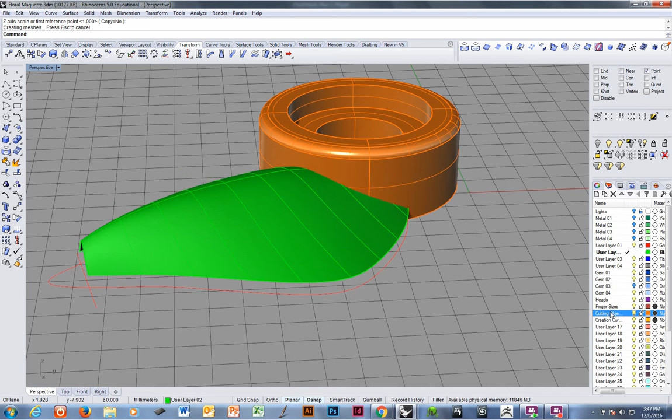Now I'm going to do a couple of things. I'm going to put the sidewalls on. To do that, like I showed in class, I'm going to extrude using the edge of the surface. It's important to use the edge of the surface.

Before I do that, though, I have to ask you, do you like this or do you want more of a crease? No, I like them.

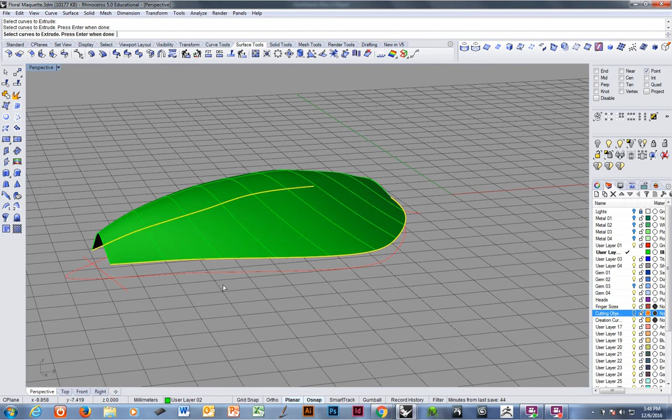All right, so I've got the two curves. I'm going to just pull them down. That's fine. I want them to be even with the C-plane, so I'll turn on the control points. Oh, I have to explode it first because they're extrusions.

I hate that. Now turn on the points. Grab these two rows. I have no idea. These are new surfaces, so this button might select them all, or this button might select them all. I'm going to try that one.

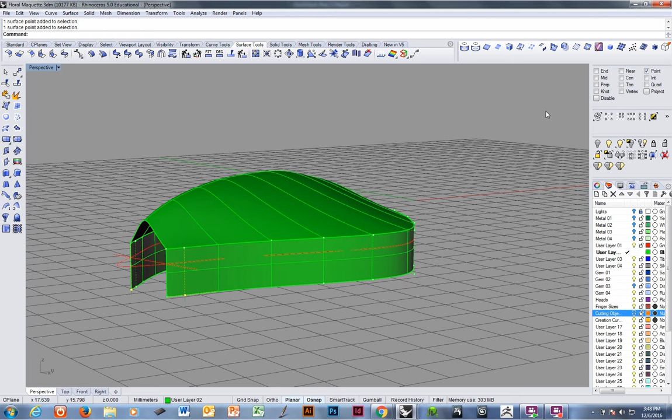I was wrong, so I'll try this one. Perfect. I'm just going to project to C-plane. Whoa, hang on a minute. I have to make sure it's at the top C-plane. Top C-plane. There.

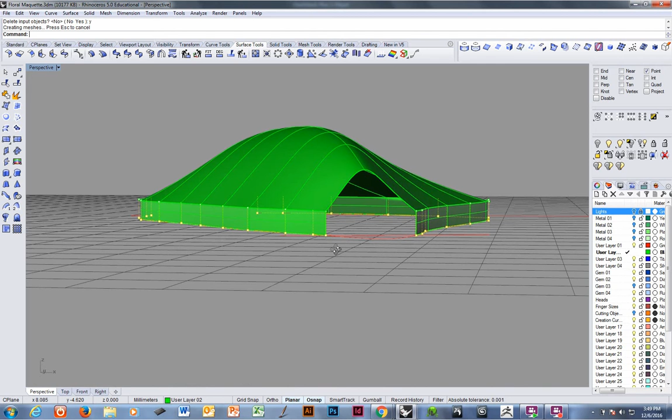Just like yours. Okay, but now what I want to do is round the edges. I don't want a corner. Corners are bad. So I'm going to grab the top rows.

And I'm going to move those down. I can use gumball for that, or I can go into a front C-plane, either one. I'm going to move them down a ways.

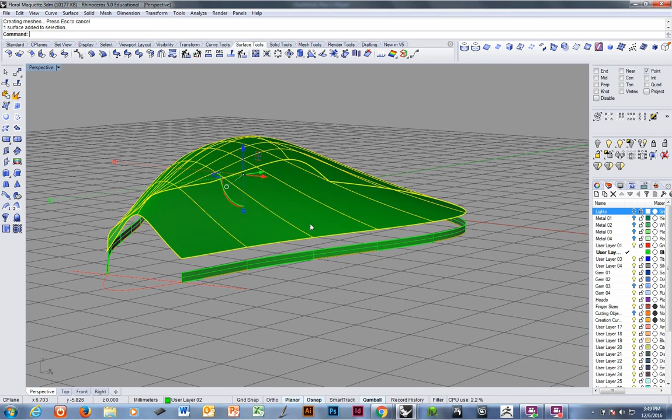Okay, I'm going to turn these points on. I'm going to grab these two outlying rows. I'm going to move those up a ways, because I want this to really round off.

Now, my fear is I only have 5 rows of points, and I'm afraid when I match this that I'm going to lose something here, but I'll try it and see. Surface, Edit Tools, Match.

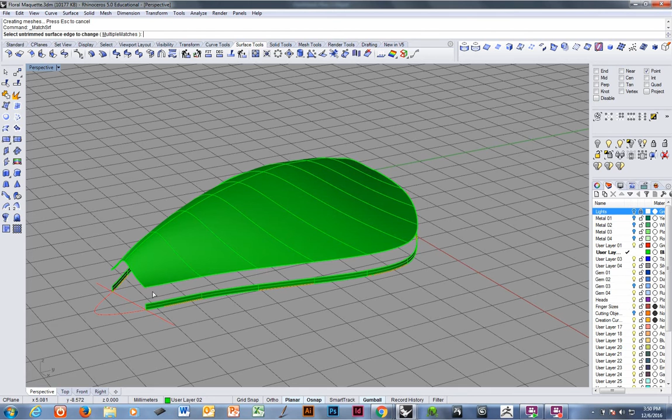And I want to look at what happened here. See how I lost that? It's because there's not enough control points for Rhino to control the surface. I figured that would be the case. So after I do my basic sculpting, I come in and throw in some points so it'll be strong, rigid.

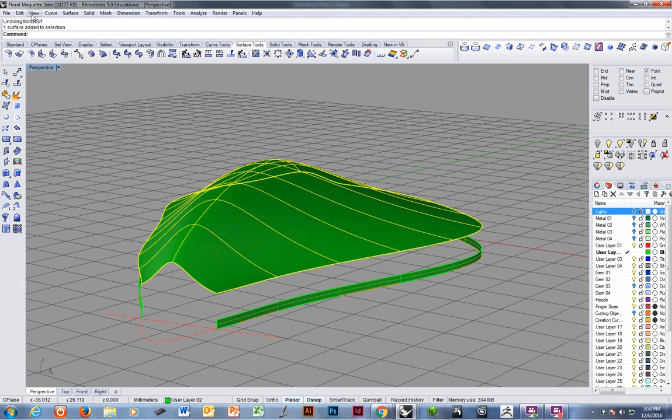So Edit, Control Points. What you want to do is not insert points — you want to insert knot. We want them to go this way, not this way. So I just hit T for toggle, or I can click toggle. Toggle goes up, it just switches the direction.

Same thing when you're extracting an isocurve. If you hit extract isocurve and it's not the direction you want, just hit toggle and it goes the other direction, because otherwise you got to pick select direction U or direction V. Do you know which direction this is? I don't. So toggle is a whole lot faster.

Now I want it to be symmetrical, same on both sides, so symmetrical equals yes. Look at that.

Okay, I'm going to give us some extra points in the middle. It won't change your shape at all. Adding a knot won't change the shape — taking it away will. But we're just giving Rhino more information. Rhino goes, oh, thank you, thank you, thank you. Okay, see, no change. And I'm going to put one out here towards the sides.

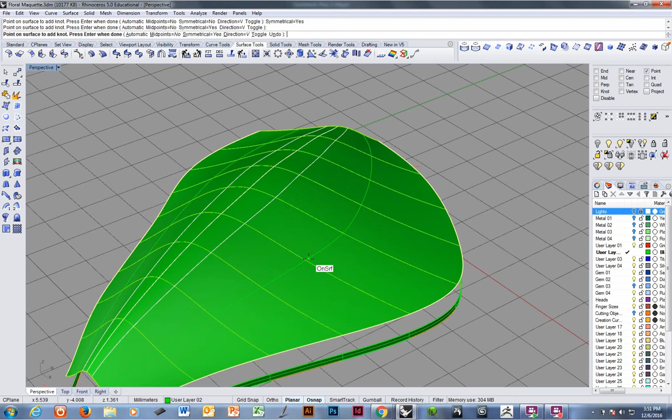On both sides, so now we have more points. You don't want to do that in the beginning, because if you're trying to do all that careful sculpting and you have a lot more points, that's a headache. When you're sculpting, you want very few points. After that, you can add points, add points, add points.

This is weird, hang on, someone's calling me. Hang on. Hello? Hello? That's my doctor, hang on. Oh, I'm not talking to him. They're just confirming my appointment. Yeah, gonna go check my eye. All right, as we were.

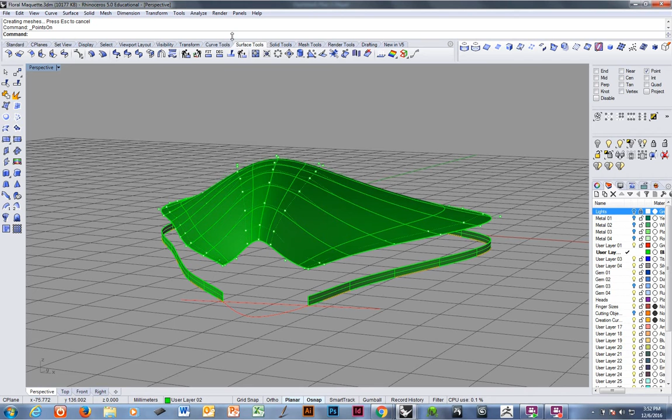Now watch the difference when I do the match. Notice how that didn't change. Your top stayed the same. And the reason it stayed the same is there are more points in here.

Remember the curve math from the very beginning of your learning Rhino — that when you have a third degree point, third degree curve, or a third degree surface, if you move one point, it affects it two points away. Okay, so we didn't have enough points in between. So moving this one point moved this point, and it was moving one of these points up here, which was changing the whole shape. Throw in some extra points — yeah, it has more resistance. Okay, so that's good.

I'm going to do the same thing over here.

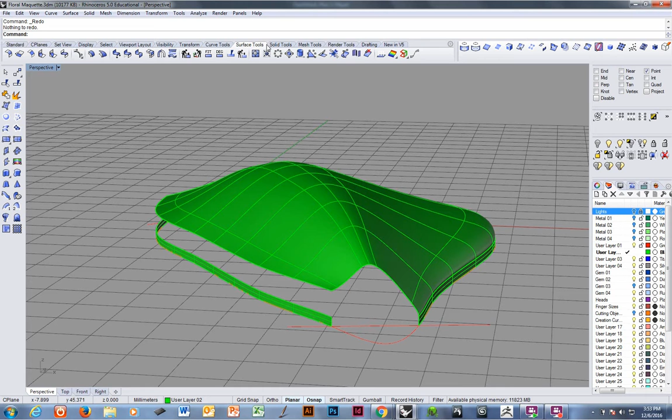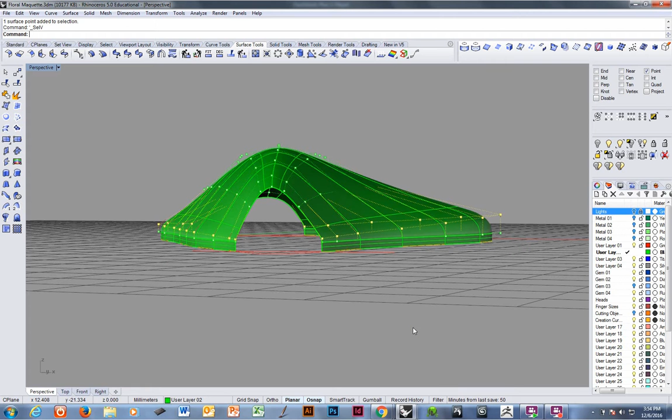Match surface. Same thing. Nice and smooth. Now, I usually don't like what Rhino does right here at the corner because it puts this row of points right on top of that row of points, which to me always looks a little crazy. So I usually like to come back in and just lift them up a little bit, just because it gives a little bit more softness.

Okay, so you have a basic leaf form now, right? Yeah, and you can do whatever you want to with it.

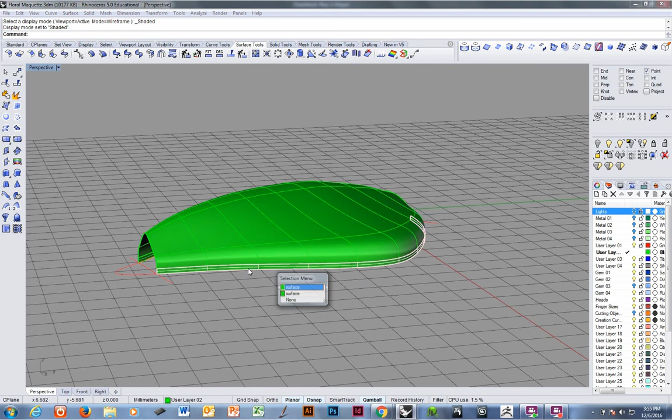By the way, these surfaces don't matter. We can throw them away at any time and recreate them. So for example, I'm not saying this is something you want to do, but if you did, I can throw those away, just because I don't want to have to control them. I can come in, turn on the control points, and say, you know what, I don't like this lump.

Now, I made this based off the original curves. But maybe after working with the surface for a bit, you decided you wanted something a little smoother. As long as you make sure you drag all the points all the way down. Don't just touch one, that'll kill you. Drag a window, drag a window.

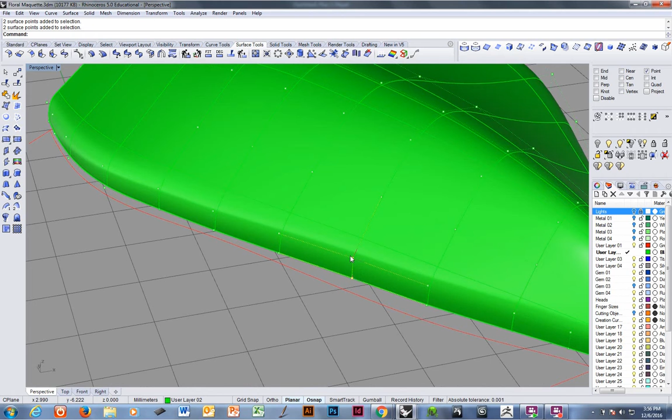Because if you don't, what's happening here is you're not selecting one point, you're selecting two. And if you just click, you'll pick one or the other. And see this nice smoothness? Bye-bye. So when you're control point editing in an orthographic view, because you can't see all the points, make sure you drag a window so you get everything all the way down.

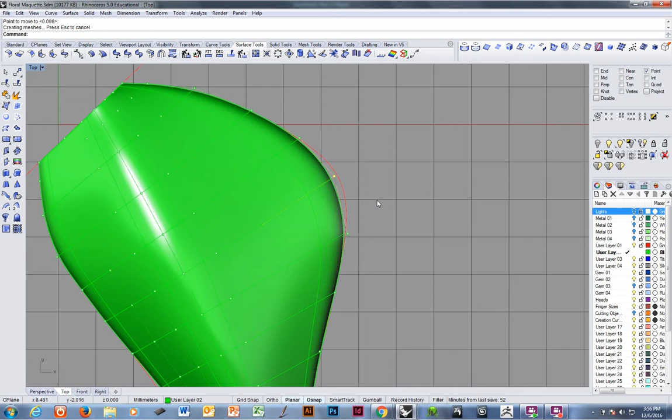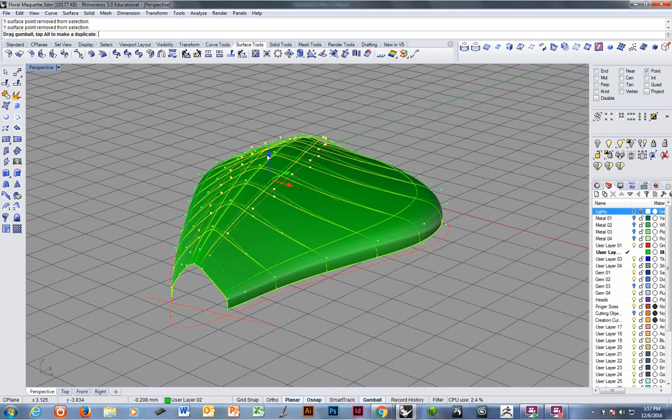But so if I want to change it, I can. If I want to change this, nobody's stopping me, I can do whatever I want. And if I want to play with the form, let's say you did want that sharper crease back. Let's select those rows. But we don't want it all the way to the front. Say we want the front to stay kind of smoother, but we want the back to be more creased.

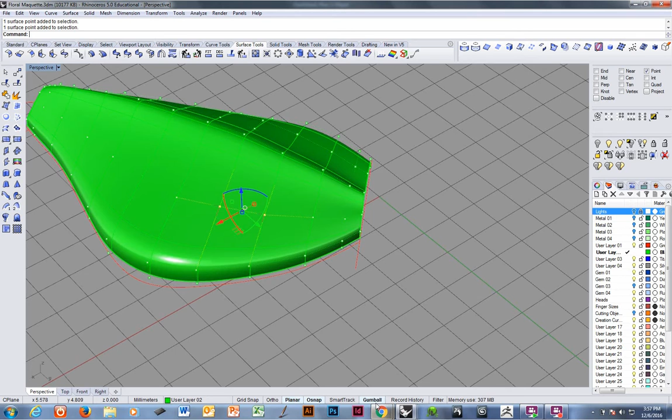So it's whatever you want. You know, if you want it to have more of a puffiness, let's say through here, where it's fatter. But you don't want it on both sides, you just want it on this side. Fine.

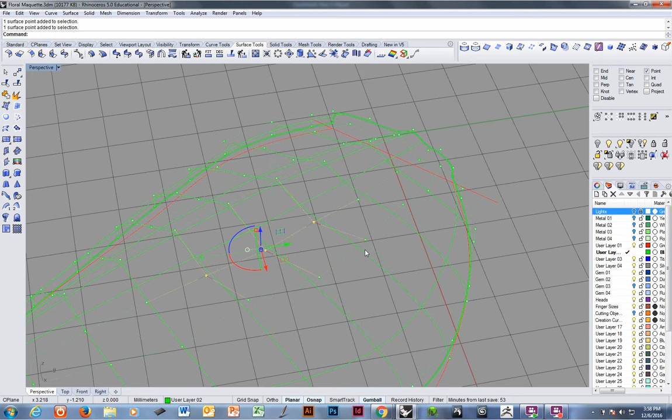What if you want to have the groove go deeper here? As long as you don't move them side to side, as long as they're up and down, nothing will happen. If you want them, you can move them side to side. It's just a little more dangerous, from the perspective only. Yep.

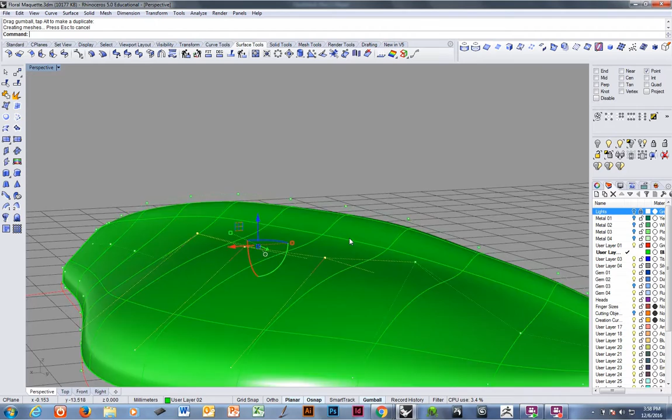And you can actually, I always say revolve, look around, make sure you like what you're doing, so that you can change things that you don't like. Keep in mind that the more fancy you make one, you may have to make them all more fancy. So you might not want to do that, you might want to keep them simple.

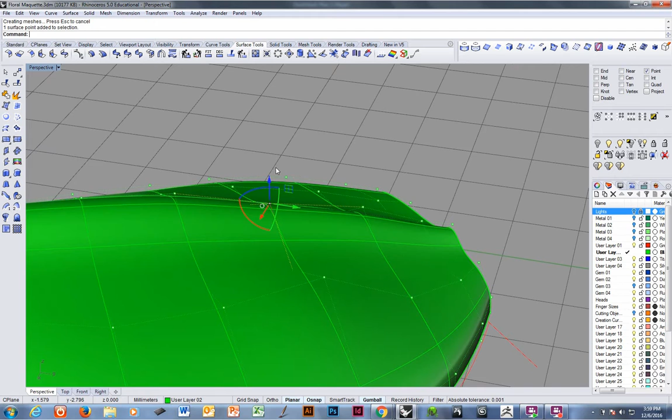If I want to take this ridge out right here, I just... Now it's smoother. If I want to make the ridge really sharp through here, I'm going to need more points to do that. But actually, I see kind of a dent right here, I want to fix that. So I'm going to grab this one, pull it up. That's good, yeah.

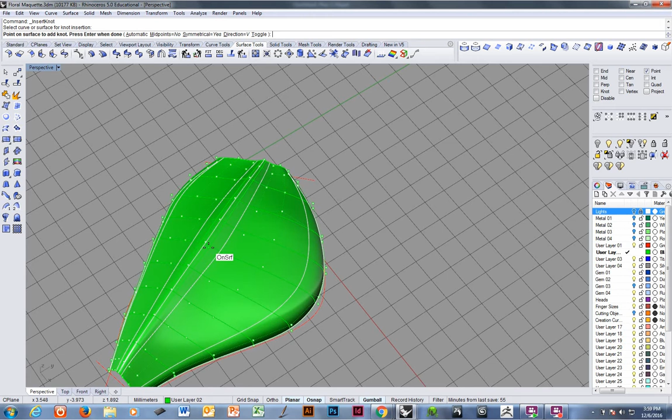But if I wanted, I'll undo it, but if I wanted to put a sharp ridge on here, I would insert knot. So edit tools, control points, insert knot. Once again, with symmetrical on, I'm going to pull these nice and close to that center row. Won't change a thing, it's going to look exactly the same.

But now let's say I want it really... I'm going to get rid of gumball. Let's say I want it to be really pinched through here, really sharp. Well, the way you make sharp with control points is you bring them closer together. If you want a corner, bring them on top of each other. But the closer you get, the more of a crease you get.

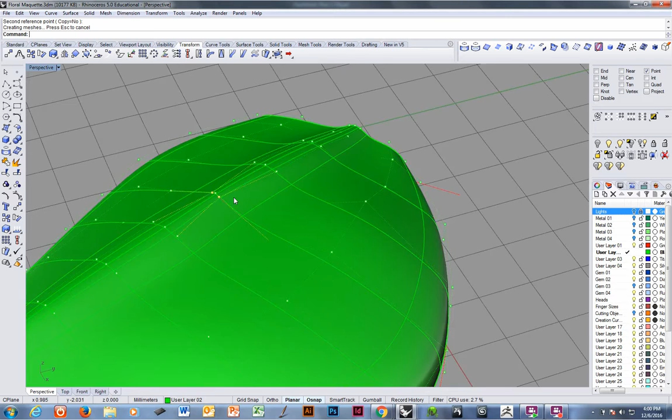I'm going to do a 2D scale, Copy=No, so they can't go up and down, they can only go this way. Point snap, grab this point, pull them close together. I'll do the same thing here. And I'll do the same thing here, but not as much. And I'll do the same thing here, but less.

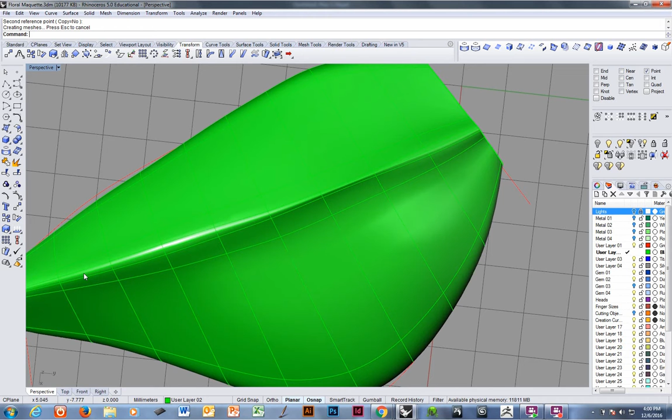Soft crease, sharp crease, soft crease. This is the only way to do this, is to come in and do it by hand. It's like carving wax. You can make anything you want this way. And if you decide that you don't like it, unlike wax, you just undo.

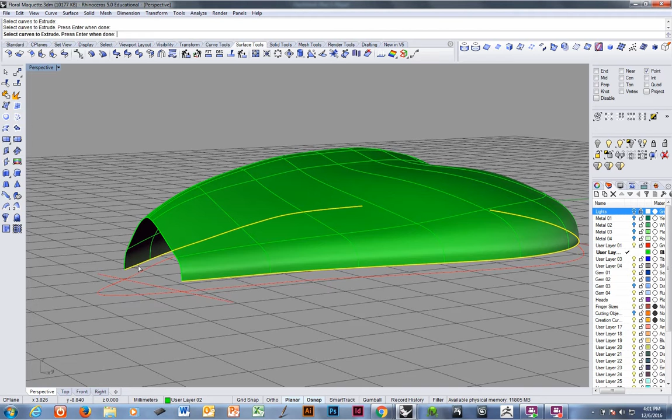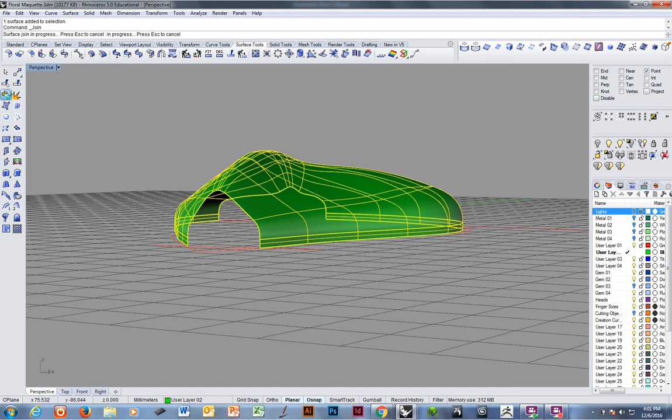I have to explode it first. Going to grab a couple of points here. Grab those rows, project them back to the C-plane. And then to make sure that everything is... actually, everything looks like it's still matching. I can turn on the E-map. See how smooth it is.

If we'd have changed points down at the edge, I would rematch. But we didn't change anything at the edge. We just moved them back and forth. And it's still nice and smooth. That's nice. Yep.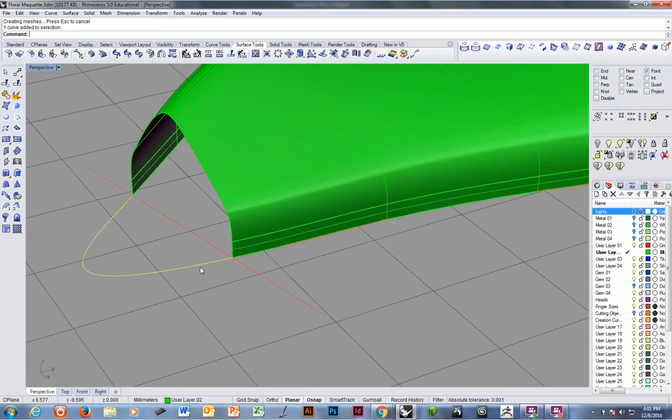The only thing you have to do now is the point. And the point... Okay, this curve may not be matching anymore. I'll make sure it does by making a new curve. Which drawing tool would I use to make a rounded curve right here? Is that the extra... Blend. Yeah, extra blend.

Yeah. Curve, Oh, just blend with adjustable curve. Adjustable curve blend. Make sure I get my edge of my surface, because that drawing doesn't mean anything anymore. Right. Get the edge of my surface. You had this with the scrolls. Yep. And now I'm going to pull these points out.

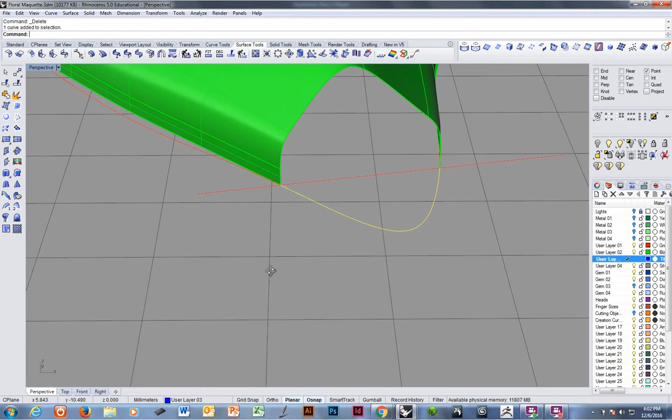That's pretty good. That's pretty close, right? Yeah. I can throw that away now. I'm going to extrude this straight up until it matches here. Because this curve was smooth, this surface will be smooth, because it's just straight up and down.

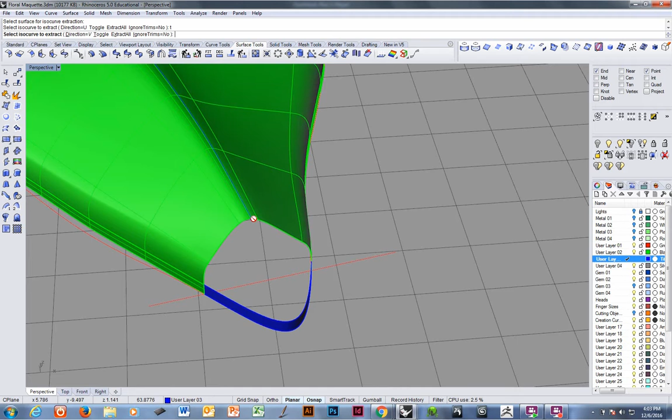And now I need to extract an iso curve down the middle. I don't like that direction. Key enter toggle. I want it basically in the middle. But I'm not picky because in this case, middle doesn't look right. It looks off to the side. So to heck with middle. I'm going to put it right here because that's where the actual middle on my design is here.

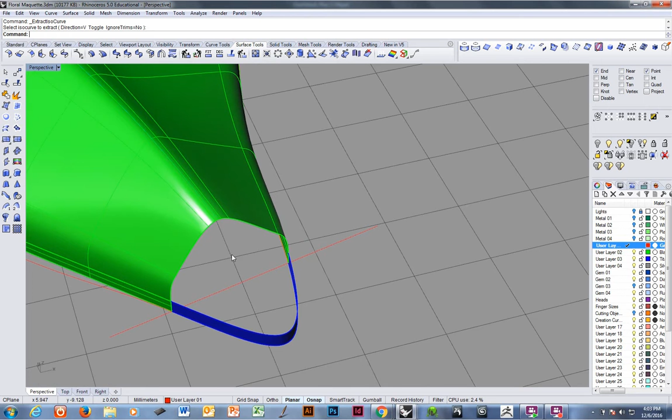And I want to put another, I need to get another iso curve here. I'm going to pick something. Now, if I want it to be a straight line, and usually I do, I like my cross sections to be in a straight plane. If I want that, I'll grab this curve, extend it by line. That guarantees I get a straight line.

I'll make it nice and long. I'll explode it so I only get this piece, and I'll project that onto that surface. That's a perfectly straight line from here to here. Yeah. But it's not important to do that. I just like to do it because I'm from Utah and I'm picky.

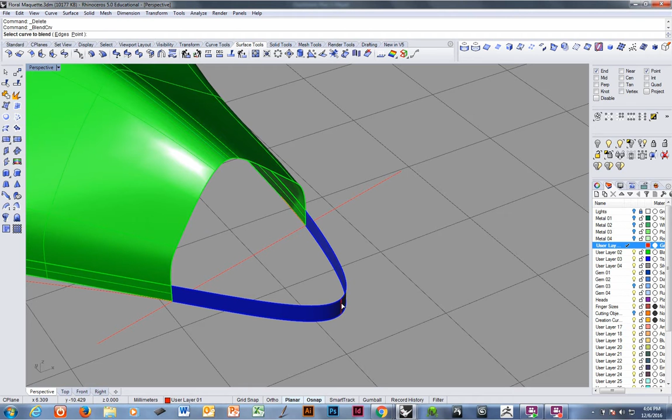Okay. Curve, blend curves, adjustable blend curve. Not you. Not you. You. And you. Okay. Adjust my points. Till I see something I like.

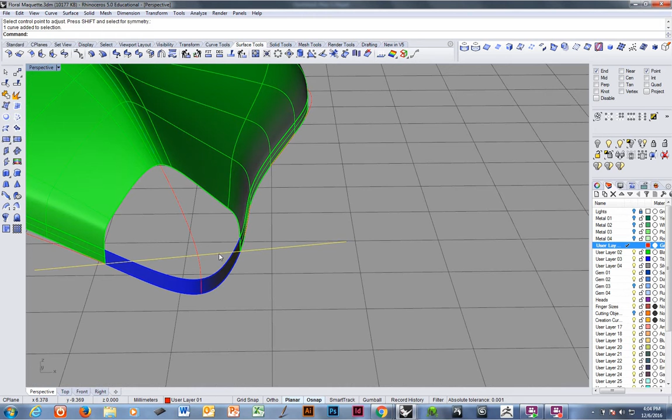And when we're doing a 3-rail surface from Surface from Curve Network, we have to have 1 rail, 2 rail, 3 rail. Right now we have 1 surface here. I need to split the edge right here. Right now that's all 1 edge. When I click right here, now it's 2. The rest of it's easy.

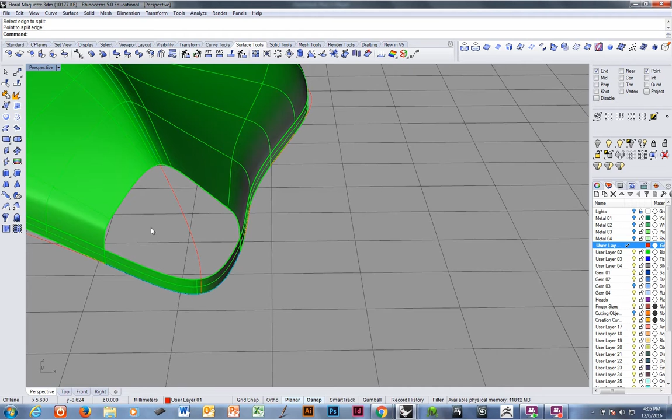Surface from Curve Network. Edge rail, curve rail, edge rail. There's my 3 rails. Edge section. Fantastic.

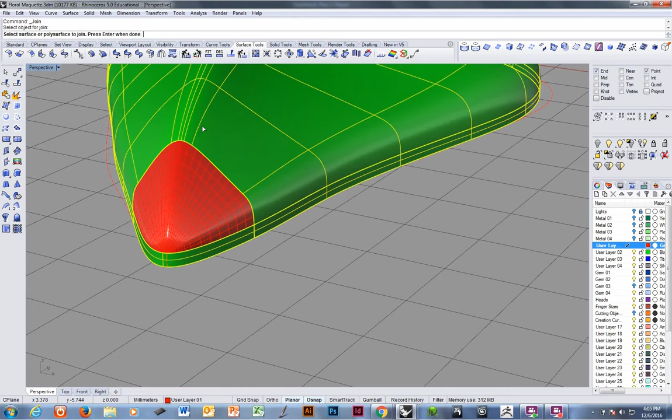And then join it together. And then we'll come in the back and we'll just cap it. Go ahead and I'll just use this surface. Trim this line off. I'll extrude that line straight up. Use this to cut away the rest. And join that together. And then I'll cap the bottom.

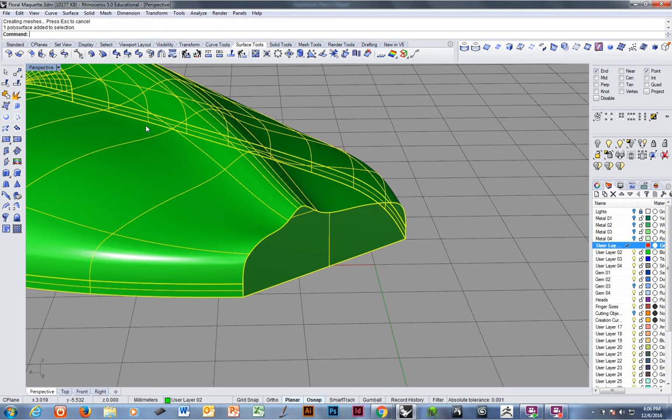Solid cap planar holes. Put a bottom on it. That petal is finished. Okay? I'm going to turn off the curves. And bring back your maquette.

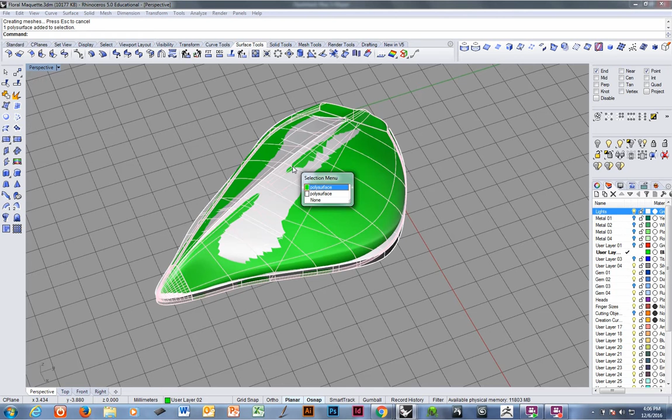Going to use grid snap to move it out of the way so we can move it back. That's the only reason I use grid snap, is so I can move things back and forth accurately. There's the maquette. Wow, big difference. There's the finish. This is ready to be assembled into your final piece.